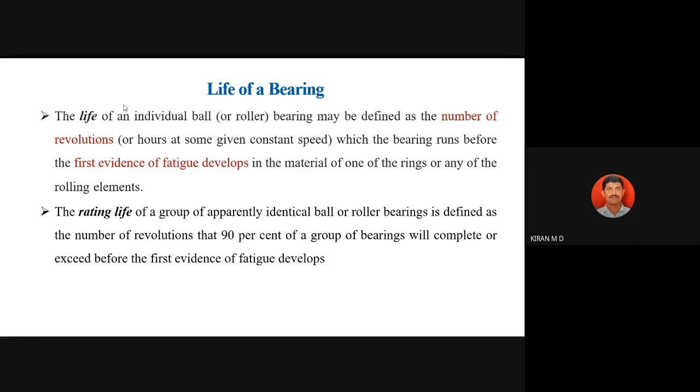It means the life of bearing we consider for individual bearings, while the rating life we consider for group bearings.

For example, if you are using in automobile or industrial application 100 or 200 bearings installed at a time, all the bearings will have the same type of revolution and same type of load. So after a certain number of revolutions, 90% of the bearings in the group should run the prescribed revolutions before the first evidence of fatigue, before failure.

For example, in individual failure, if I consider, it will run at 10 lakh revolutions. If the same bearing is installed in a group of 10, 9 bearings should complete that 10 lakh revolutions. In that case, we consider rating life equal to 10 lakh revolutions only.

Otherwise, the individual life of bearing may be 10 lakh, but rating life may be less or more. So that we consider as the rating life, meaning here the group of bearings is considered. Is it clear?

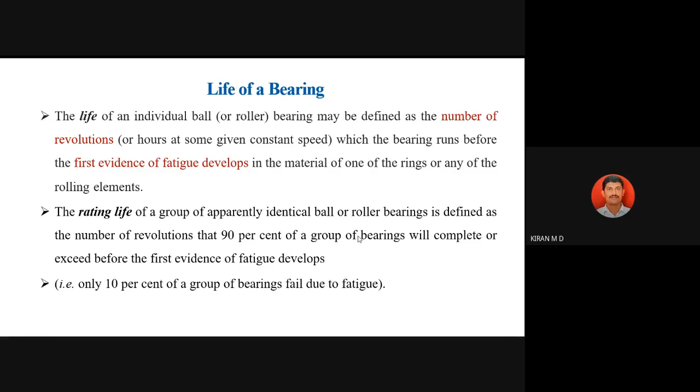Another term is minimum life. Minimum life is also used to denote the rating life. So when you are considering the rating life, we are also going to consider this minimum life.

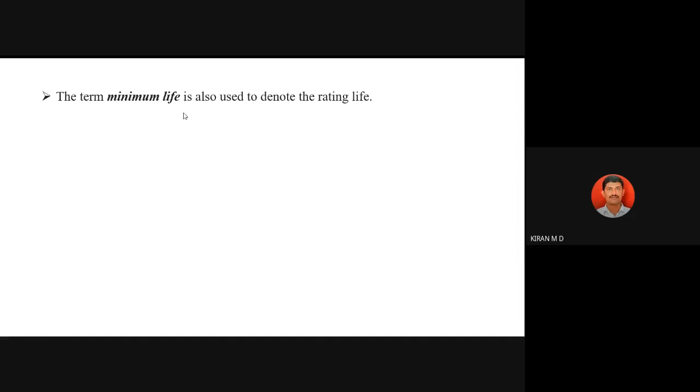The minimum life is the life which 50% of a group of bearings will complete or exceed. Rating life means 90% of the bearings should complete the whatever revolution they are going to rotate. So in 10 bearings, if 9 bearings complete 10 lakh revolutions, we are going to consider rating life as 10 lakh.

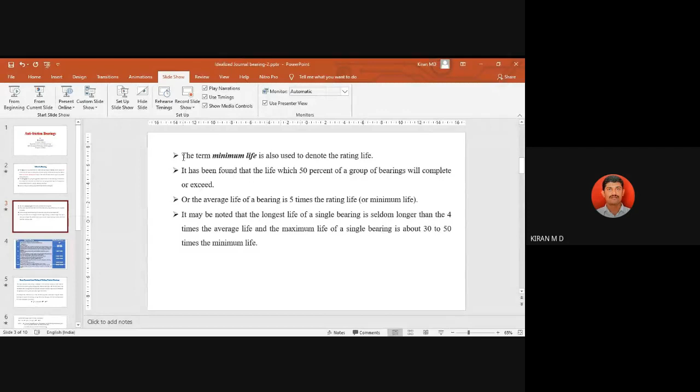Let me take another example. If the life of the bearing is 10 lakh, and we are using the same 10 bearings, consider the life of an individual bearing is 10 lakh. When the bearings are running, 9 bearings will run up to 8 lakh revolutions, then failure starts. So 8 lakh is the rating life because 9 bearings run for 8 lakh revolutions, and it continues.

Then one by one, bearings start to fail. For example, after 8 lakh revolutions, some bearings may fail, so only 5 bearings remain running up to 9.5 lakh revolutions. That 9.5 lakh is the minimum life of the bearing. Is it clear? Yes sir, shall I explain this concept once again? No sir, okay.

So individual life is the maximum life of the bearing. Rating life means 90% of the bearings should run for a particular revolution - the life of 90% of bearings we call the rating life. Minimum life is 50% of the life of 50% of bearings - even if 50% of bearings have failed, the remaining 50% run for a certain life, which we call the minimum life.

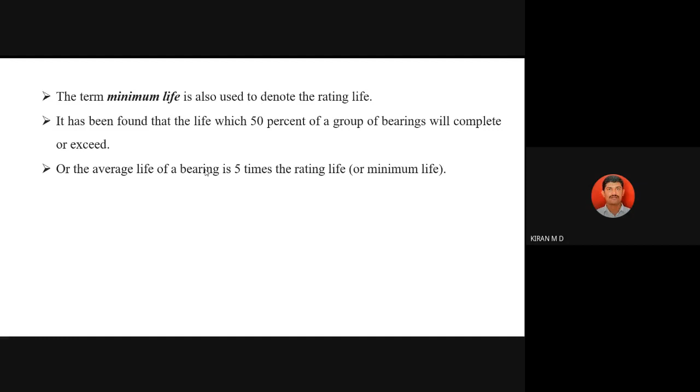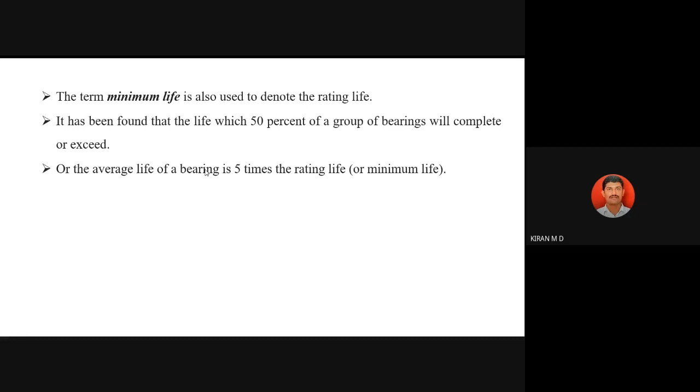We can also define average life of a bearing as 5 times the rating life. So average life of the bearing is considered 5 times the rating life. The longest life of a single bearing is seldom longer than 4 times the average life, and the maximum life of a single bearing is about 30 to 50 times the minimum life.

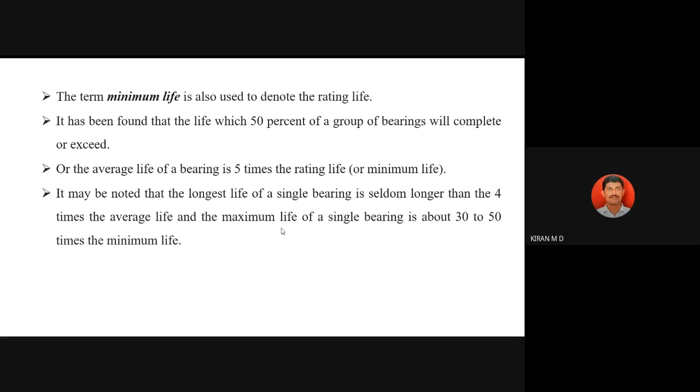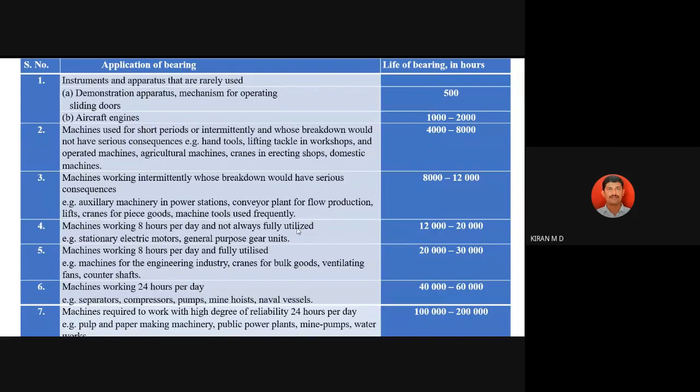So next, last class we discussed static load rating for rolling contact bearings, either ball bearings or roller bearings. Today we will discuss dynamic load rating. This basic dynamic load rating is defined as the constant stationary radial load or axial load which a group of apparently identical bearings with stationary outer rings can endure for rating life of 1 million revolutions with only 10% failure.

According to IS 3824, the basic dynamic radial load rating for radial and angular contact bearings with ball not larger than 25.4 mm in diameter uses the equation: dynamic load rating C equals Fc into I cos alpha into 0.7 Z to the power of 2 by 3 into D to the power of 1.8, where C is the dynamic load rating factor.

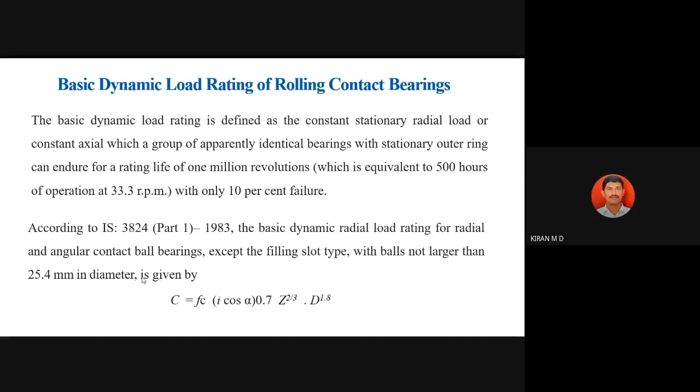This equation is for less than 25.4 mm diameter balls. For more than 25.4 mm, we use the equation: C equals 3.647 Fc into I cos alpha into 0.7 Z to the power of 2 by 3 into D to the power of 1.8. This equation is for dynamic load rating for ball bearings having ball diameter more than 25.4 mm.

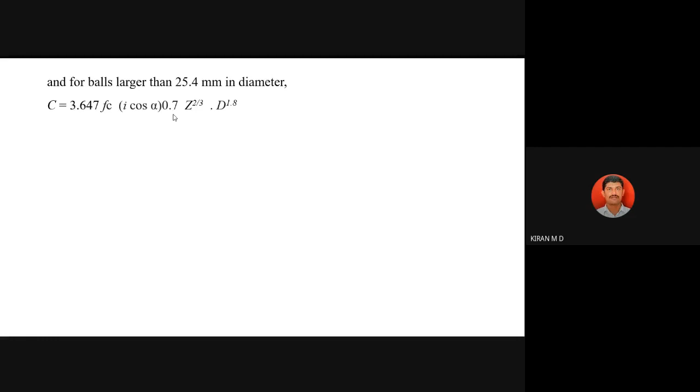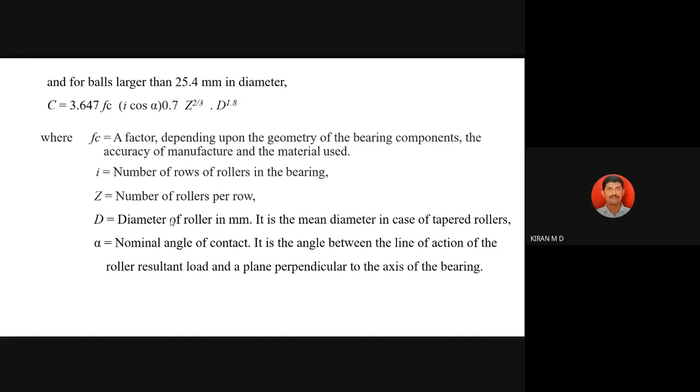Where Fc is the factor depending on geometry of the bearing, accuracy of manufacturing, and material used. I is the number of rows of balls in the bearing. Z is the number of balls per row. D is the diameter of the ball. Alpha is the nominal contact angle; in some cases alpha is 90 degrees.

For roller bearing, we use the equation: C equals Fc into I into Le cos alpha into 7 by 9 Z to the power of 2 by 3 into D to the power of 29/27.

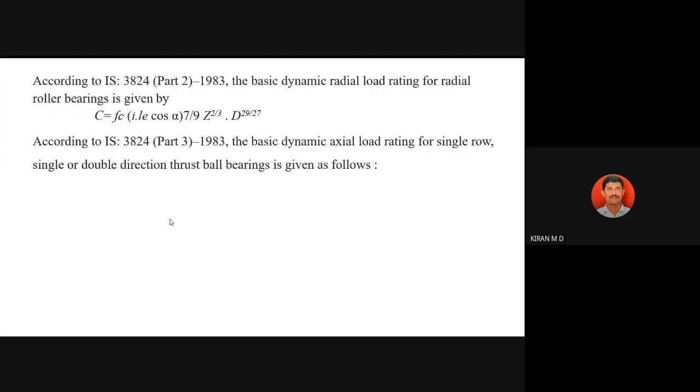For single row, single or double direction thrust bearings, first case for ball thrust bearing where the ball diameter is less than 25.4 mm and the angle is 90 degrees, we use the equation: C equals Fc into Z to the power of 2 by 3 into D to the power of 1.8.

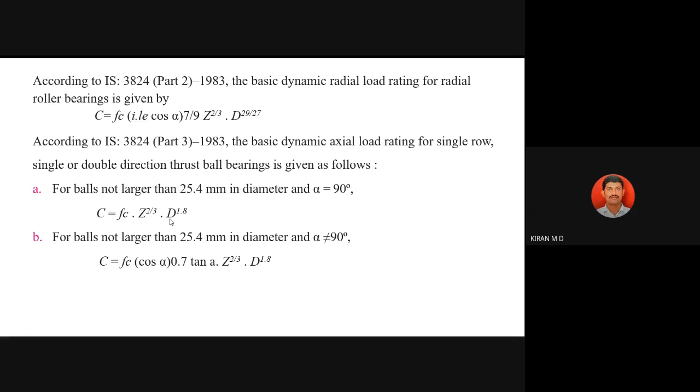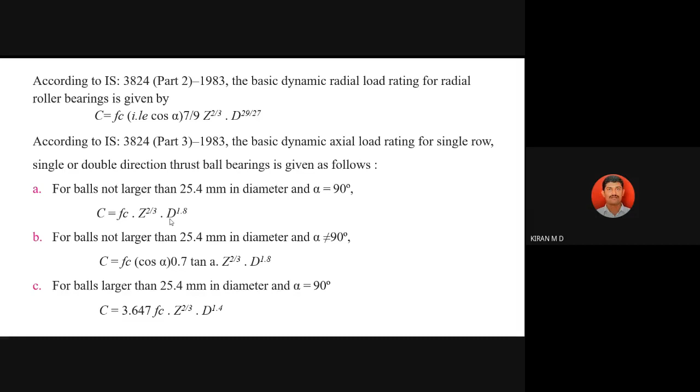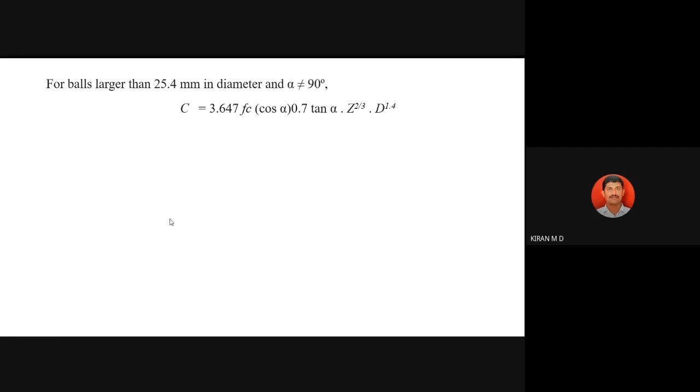For ball diameter more than 25.4 mm and alpha equal to 90 degrees, we use this equation: C equals 3.647 Fc Z to the power of 2 by 3 into D to the power of 1.4. Similarly, for ball larger than 25.4 mm diameter and alpha not equal to 90 degrees, we use this equation.

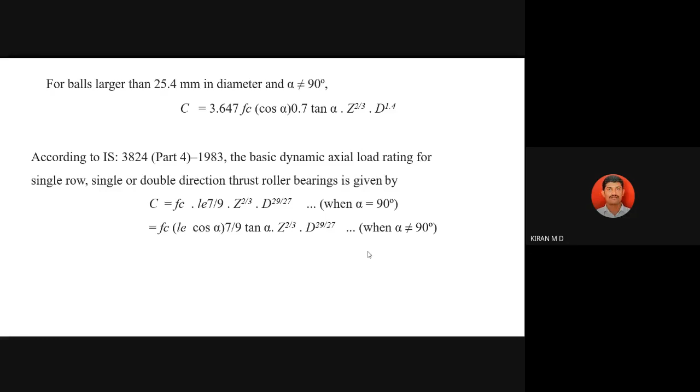For dynamic load rating for single row, single or double direction thrust roller bearing, we use these equations: if alpha is equal to 90 degrees, we use this equation; for alpha not equal to 90 degrees, we use this equation. These are the equations for basic dynamic load rating.

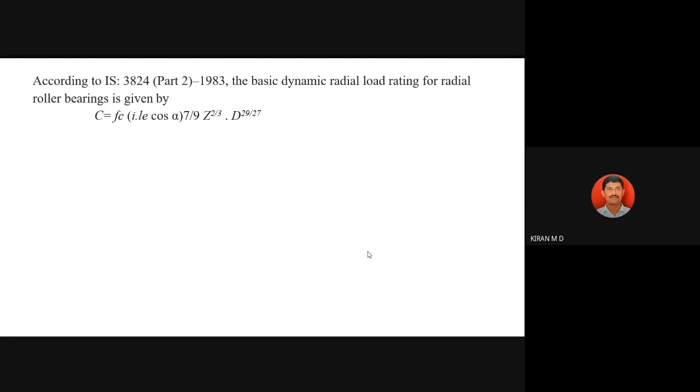Similarly, the dynamic equivalent load may be defined as the constant stationary radial load in case of radial ball or roller bearing, and axial load in case of thrust ball or roller bearing, which if applied to a bearing with rotating inner ring and stationary outer ring, would give the same life as that which the bearing will attain under actual condition of load and rotation. So if the bearing gives the same life as for the actual loading condition, we call that the dynamic equivalent load.

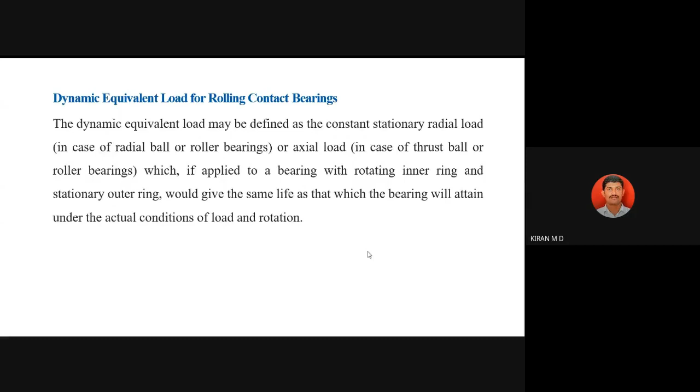For the dynamic equivalent radial load W, for radial and angular contact bearings except filling slot type, under combined constant radial load WR and constant thrust load WA, the dynamic equivalent radial load gives X into V WR plus Y into WA.

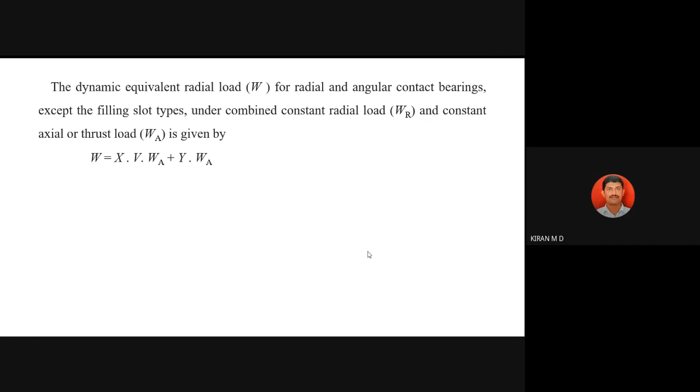Here V is the rotation factor: 1 for all types of bearing when inner race is rotating, 1 for self-aligning bearings when inner race is stationary, and 1.2 for all types of bearing except self-aligning when inner race is stationary. The values of X and Y are the load factors, radial load factor X and thrust load factor Y. This is the equation we use to find the dynamic equivalent radial load.

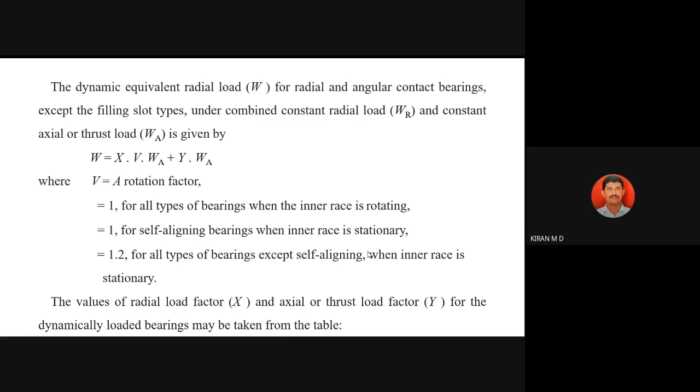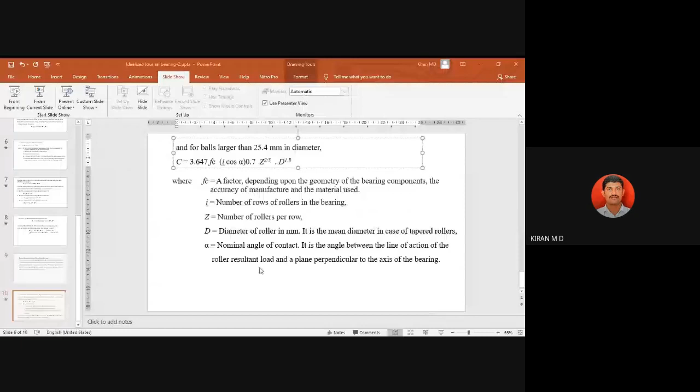So any doubts? No, sir. No, sir. Okay, these are just theoretical concepts you should remember, so you won't get problems on this one. Yes, sir.